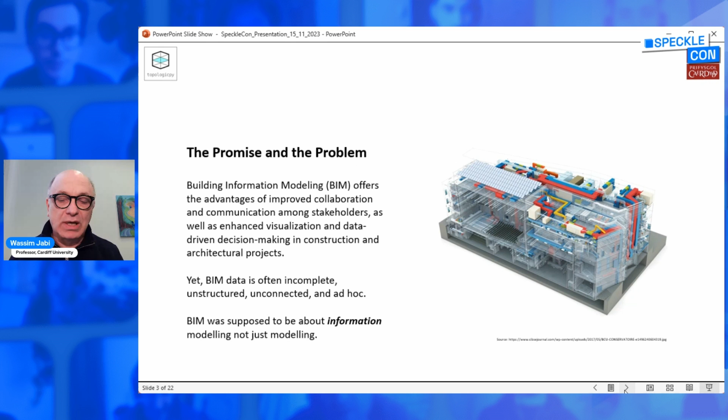But going back to what we are proposing as an alternative methodology, we would like to impact the architectural design and development process to encourage architects and designers to design a succinct but semantically rich conceptual model. And I would add to that perhaps a topological model, meaning that entities in that object are interconnected, are linked together. And then once you do that, you analyze those relatively simple models, geometrically simple models, but they are topologically sophisticated, and they are full of information that enables you to analyze them to ensure quality, efficiency, sustainability, and value.

Once you are done with that iterative process of building these models, generating them, and perhaps AI and generative methods can help you with that, and Topologic obviously will be helping you with that, then Topologic in combination with really advanced scripts and AI and machine learning can automatically and intelligently convert those to fully detailed BIM models. If you've heard me talk about Topologic and BIM before, I always say humans should not be wasting their time putting conference chairs in conference rooms or figuring out where the windows should go, etc.

We have a long tradition of knowledge that we don't encode. We should encode it in our processes. And AI and software is much more adept at populating and generating BIM models from very rigorous conceptual models that capture design intent. And this is one of my pet peeves, basically, is that these BIM models, as sophisticated as they are, don't always capture design intent.

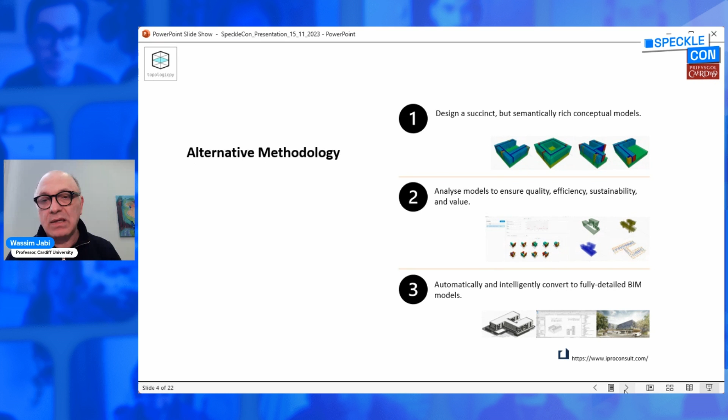And I believe we can capture them by a combination of geometry. Of course, we cannot get away from geometry. We need it, but also topology, how things are connected to each other, what should remain connected to each other, and then semantics and information that carry all the other non-geometric, non-topological information that is also needed.

So just some use case scenarios. We have been working with a large company in Germany called IPROconsult in Dresden. And what we have worked on, especially with Ahmed Al-Tahlawi and his team, is to take TestFit models. This was early on, before TestFit did their own plugin. So we were the first to do that, where we took TestFit models and through Topologic, captured those models

and converted them into well-connected topologies, and then imbued them with all the information that's coming in from the TestFit files, and then converted them automatically to Revit files. Obviously, they have their own plugin right now. We're really happy. We have worked with them for a long, long time, and I think it's right that they have now included that kind of converter in their software.

But we take it a step further with TestFit in the sense that we can build graphs behind the scenes of these buildings, and we can detect rooms that are supposed to belong to each other, like say in an apartment. In this case, this has been applied to a student housing project. It's a 20 million euro project that's now complete and constructed that used Topologic to optimize distances and optimize daylight. But also because we have this topology, we can tell which rooms need to be linked together, and therefore we can automate all sorts of schedules and color coding that you need to do in Revit.

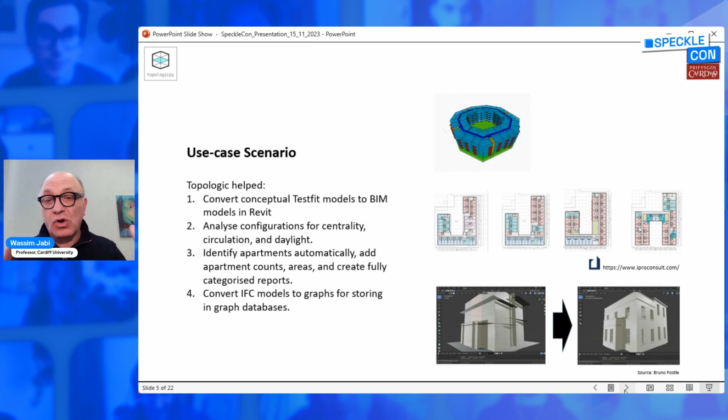In that case, he takes a very simple cube, which in Topologic we call a cell, slices it with planes, we call those faces, and just through that slicing, we build a divided volume, which we call a cell complex. And based on rules, with one click of a button, he converts it into a fully ISO-compliant IFC file with all the windows, all the cornices, all the doors put in according to those rules. And it even has an embedded energy model inside of it based on the original Topologic model. And that's all free, open source, available, so it's really powerful.

Again, if you have heard my talk before, I always talk about complexity last, not first. So basically postponing complexity to the very end, just to make the point that complex data, like what we have in BIM models, sometimes prevents you from doing the important analysis that you need to do. And this is a case where Kevin Crump, also known as the BIM guru, created this typical hospital wing of some sort, and it's available. It's also open source. You can download it and you can analyze it any way you want.

You can use it as a test case. But in order to do the kind of analysis that Topologic is good at, like, for example, shortest distance for egress or isovist, like what doors does the nurse station see or not see, visibility graphs and all of that, you need to actually peel away a lot of the irrelevant information in your BIM model in order to get that analysis done. So more information is not always better.

So we think that all of this type of analysis that's really important and can tell you a lot about your design and give you a lot of insight should be done on geometrically fairly simple models, really, but models that are not kind of dumb, excuse the word, but they are topologically and semantically rich.

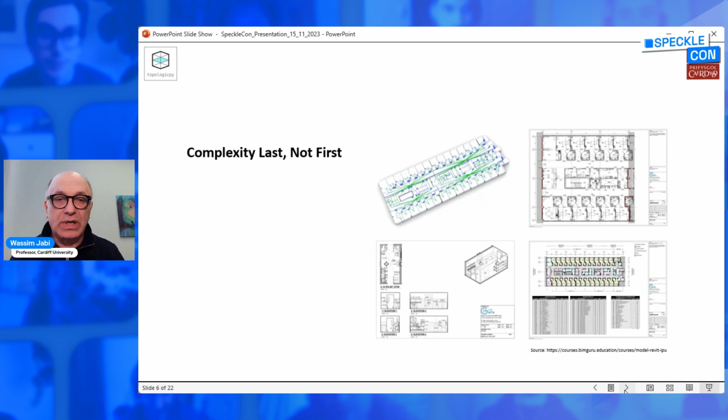But also one of the main uses for Topologic is that it builds really good energy models that can be simulated very easily with OpenStudio and EnergyPlus. And obviously, that allowed us also to go to Pollination very easily because we're reusing some of the methods that enabled us to use Ladybug and Honeybee before. And now we are combining that with our OpenStudio expertise.

Topologic is free and open source forever, as you probably have heard me say before. It also runs in Blender and Sverchok, which is a kind of a clone of Grasshopper. It connects to IFC, and I'll show you a little bit of a sneak peek at the end of how we are dealing with IFC and graphs.

But just to talk about topology for a second, topology delves into the intrinsic nature of spaces, emphasizing that the true depth of our world goes beyond surface-level shapes. It reveals the intricate web of connections and boundaries, serving as a reminder that reality is not solely defined by tangible form, but also by the intricate interplay of relationships between them. So it's not just the geometry, it's not just what you see, not an image of it, but also how these things are connected and all the information.

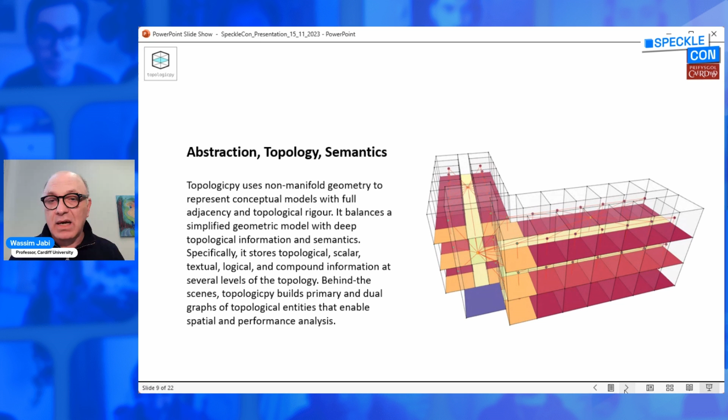So in this case, it's color coding and detecting automatically, even though I did not tell it it's a corridor or an atrium that is central to the building, but it detects that through its centrality measure. So you see that the corridors get the same color, more isolated spaces are darker red, more central spaces are lighter color, and obviously this atrium is also identified. So Topologic can take an object and decompose it into its elements. That's not very unique. A lot of systems do that.

So we can get the cells, we can get the faces, we can get the edges, we can get the vertices from a cell complex. But also, what is unique about Topologic is that you can climb up the tree. So from a vertex, you can ask that vertex which spaces use you, or which faces use you, or which edges use you. You can ask a space which cell complex uses you. So you can climb up the tree and do compositional topology.

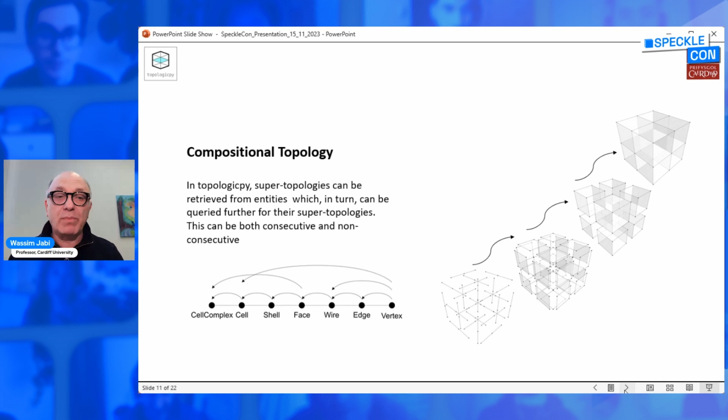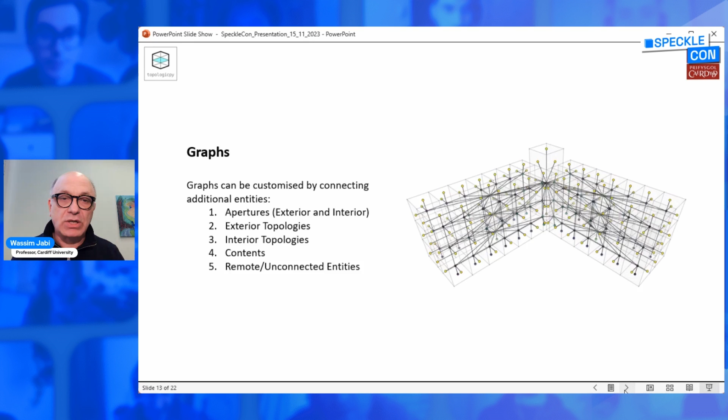So this is the graph again. In this case, we are connecting to windows and to exterior topologies, exterior faces, and it's fully three-dimensional. There's no limitation on 2D or 3D. And as I said, you can see that the nodes are color-coded because that information is still in there, fully rich in information. Lateral topology in the sense that in the cell complex, I can pick a cell and ask it to give me its neighbors. So it can immediately give me neighbors.

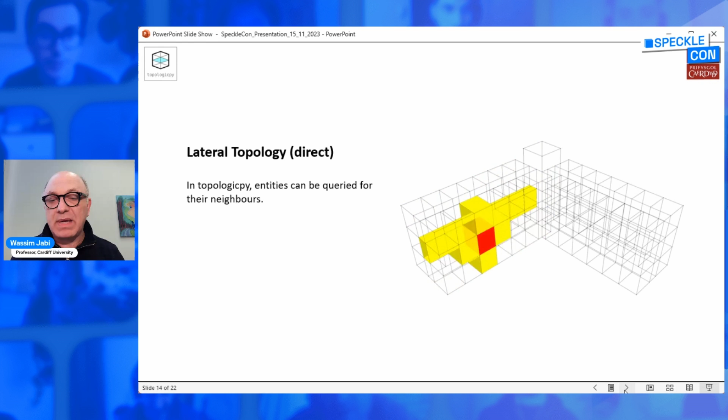And you can imagine, if you know about energy analysis, it's all about the shared surfaces between spaces and the areas of those and the U values. So it becomes very easy to build an energy model out of these types of models that you have here. Again, you can create things like minimum spanning tree. I'm not going to spend time on it, as well as shortest distances in full 3D.

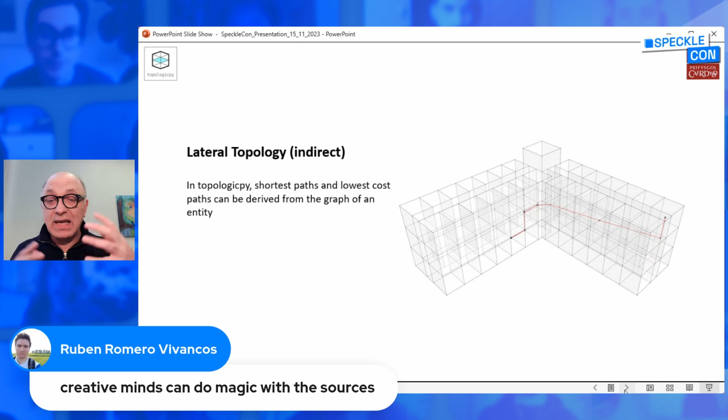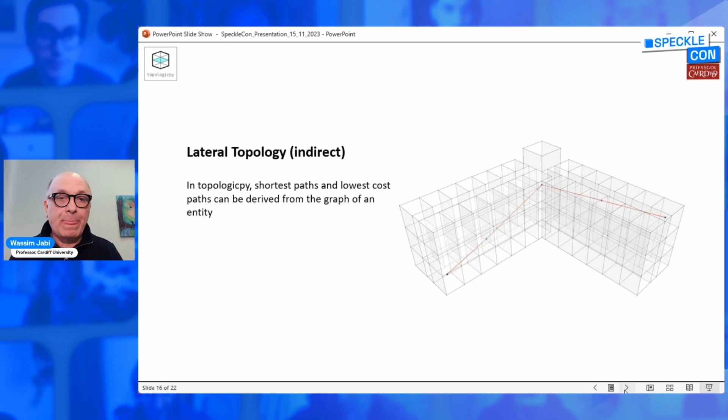So you can pick any room and say, I would like to go to another space. You can also limit it to rooms that have doors. So you can go room to door to corridor to door. You can say, I don't want to go through slabs, let's say. So it's fully versatile, as you would expect it to be. But that gives you a lot of information about egress. You can calculate where the fire exits are, etc.

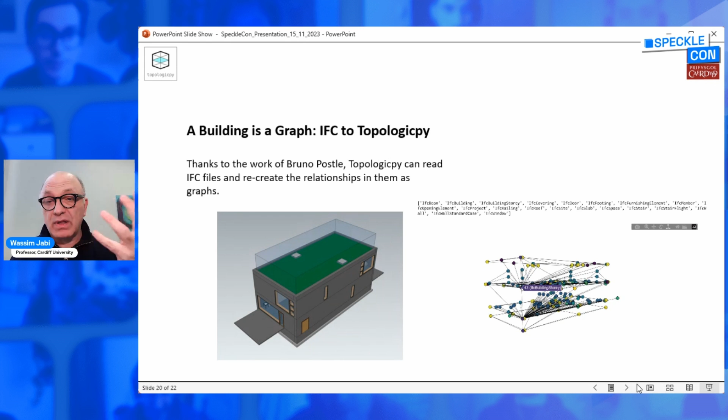As I said, I promised a sneak peek into IFC. So we're taking IFC files. This was literally completed a few days ago, basically, and converting them to full graphs based on the connectivity that's available in the IFC file. And again, they're color-coded. They're full of information. You can investigate them and analyze your file that way.

But we're here to talk about Speckle. So I was the first, I think, to connect Speckle to Pollination. I know there are other solutions now, but this was done a few months ago, if not more, basically connecting Topologic in Blender to Speckle. We have a Speckle API plugin through Streamlit, which is a web-based cloud platform, to Pollination, which is another, obviously, cloud platform. So just let me show you this video really quickly.

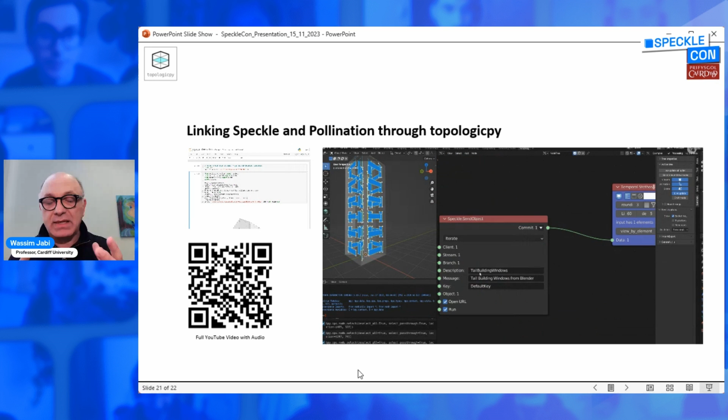Topologicpy can be accessed from Jupyter Notebook as just text, from Dynamo, from Grasshopper, from many interfaces. It's a Python library: C++ underneath, Python bindings on top. It runs on Windows, Linux, and Mac, and Apple Silicon. So it's all available. So here you see me getting the building and the windows of the building.

And you will see next very quickly, because I know we're out of time, here is the Streamlit app, where it authenticates to Speckle normally, and you get the branches. I know they've changed the names now, but that was done some time ago. And then the files get in. They go automatically to Pollination.

This is me now using my account on Pollination, finding out that the job that I did from Streamlit is now available and running. And then I am examining the daylight factors. So here they are in Pollination directly. No files were harmed. No files were exchanged.

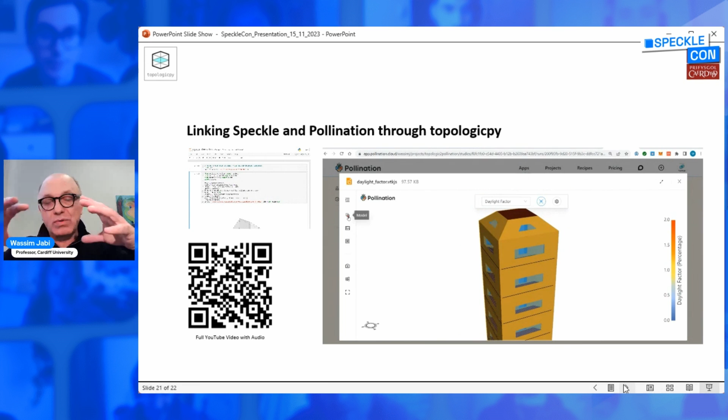It was really all a model from, I believe, Blender, but we also have Revit uploading models through Speckle, through topologicpy, whether it's on Streamlit or other cloud platforms or on your own computer, and then creating an HBJSON file, going to Pollination and getting the simulation done.

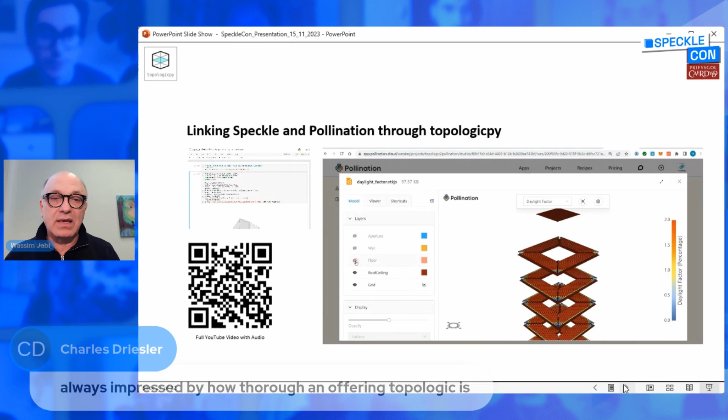Let's see. Do you use Ladybug Tools to solve adjacency, or you have your own algorithm to do it? Both. We do have our own algorithm to do it, so Topologic can fully solve the adjacencies. But as you know, HBJSON and Ladybug Tools has, I think it's called adjacency resolve or fix, I don't remember what it is, that also does it for you. So we just rely on that and use it.

But it doesn't mean that we couldn't have done it on our own, because we have that. It was a bit of an overlap in the API, so we didn't really think that we should do our own, since they've done it and they've verified it.

Are we all thinking the same thing? Topologic plus Automate plus NodePen. I think we're building on all of that. I was absolutely floored to see the Automate stuff in the morning. We have to have a chat with the Speckle team. Definitely, I see Topologic and Automate come together. NodePen, I am very aware of. I love it. We need to look at how it runs, how fast, how efficient it is.